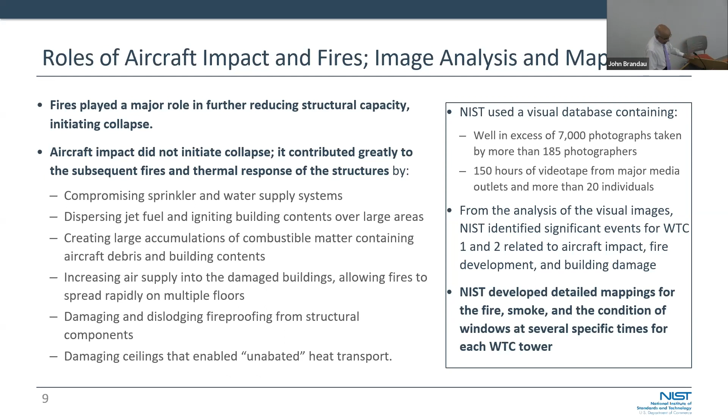So here's the next step of the analysis, which is the fire dynamics. I just want you to know that the airplane came in from the north. This is again the north tower. Fire started, and you'll see by the time this is done, the fire's at the back end. So what you'll see, and I'm not going to wait till the whole thing gets done, is that the fire is at the back end. This is where we have the inward bowing. I showed you the 55 inches.

What I'm also going to show you is we did laboratory work at NIST, the large fire laboratory. We did recreations of the workstation modules in the building with actual workstations from the World Trade Center tower, in the configuration that is there, to validate our models before we predicted the entire building.

The pieces of steel we got - how do I know there were 14 grades of steel? In addition to the documents we had, we actually did high-speed impact tests to determine the impact properties of the steel. This is called the Kolsky bar apparatus at NIST, where we did those tests. So it wasn't that we were just picking up stuff from elsewhere and assuming things - we developed a property database to put into the models. We also got how the workstations were actually located, for the fire dynamics model, so we could model the combustibles in the building with a lot of accuracy.

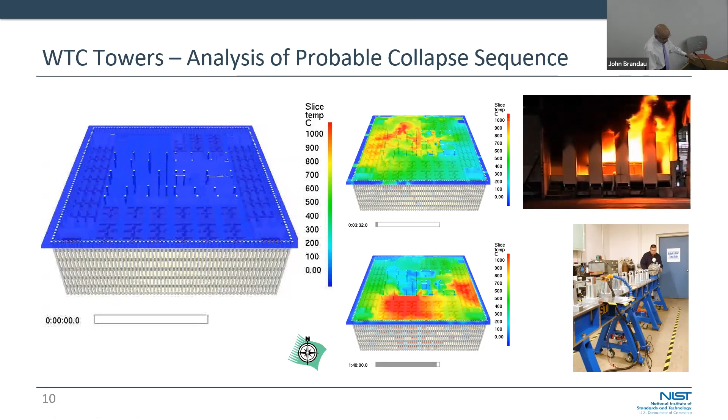All right, now I'm going to show you the end of all of this, okay? Just watch this - the first, left building, which is Tower 1. Plane came in from here. I told you, watch this antenna. And I said that the inward bowing happened on the south face. You will see this antenna tilt to the south, and you'll see the building actually tilting to the south as it collapses.

Okay, and now this is World Trade Center 2. Plane came in from here, exited on the northeast corner. This is where I showed you the inward bowing. See how the building tilts towards the inward bowing as it collapses. So I'm going to let this first one go. Watch the tower, it's going south. And I've turned off the audio for obvious reasons.

Now let me turn the next one on, and you'll see this one tilting to the east - consistent with the models, which show the photographs showing the inward bowing on these faces.

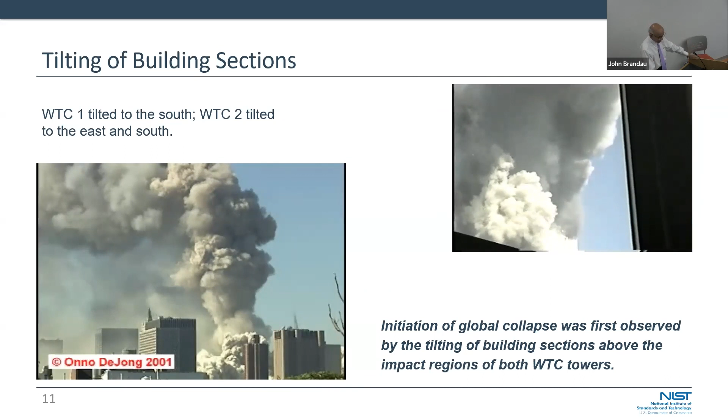So I think it was very easy - I mean, it took us 2.5 years. We started this in August of 2002. We issued our draft report in June of 2005. It took us 3 years to do all of it: collect all the information, analyze, build a model, analyze the information.

Shyam, 3 years and how much money, roughly? Nominally, we asked for $16 million from Congress - I forgot to mention that. We got that through a special appropriation, and that money actually got transferred to us in September of 2002. And I will say there was a lot of research money also augmenting the investigation money, because the two were feeding off of each other. But nominally, 16 million.

In terms of time put in, I think there were countless hours. Let me just say that the 200 people who worked on it - nearly all 200, and by the way that includes people not just the technical experts, but also people from public affairs, chief of staff, congressional affairs. This was a full court press on the part of this leadership, because you needed all pieces - acquisitions, human subjects, you name it - all those issues were involved in this.

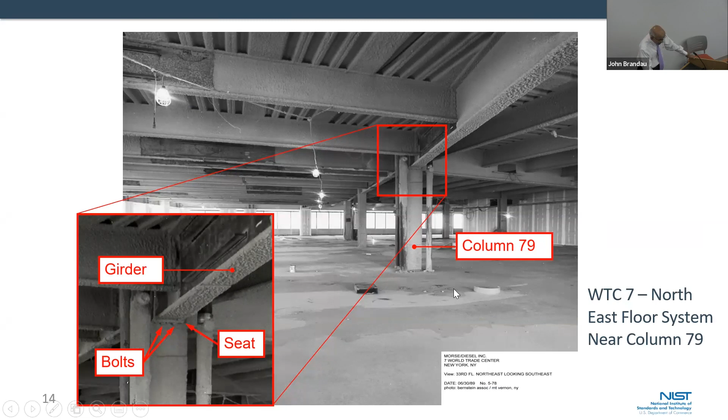You have these horizontal girders. There's nothing here pushing on the other side of these horizontal girders. This particular girder is sitting on the seat, it has two bolts, and that's pretty much it. It's not unusual, it's okay. But what causes this building to collapse is the following.

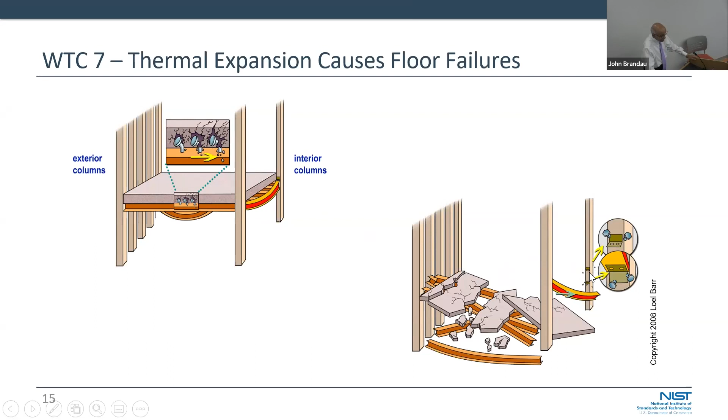As this floor gets heated up, what happens is the exterior is very stiff. The floor is being heated up, the steel expands—the thermal expansion of steel is more than that of concrete. So the steel expands, and what's connecting it to the concrete starts to crack. As it expands, those girders we saw before push on this particular girder—this is column 79, this is column 44—pushing it hard, and eventually that gives way, and the support for column 79 goes away. Just remember that.

What happens actually, when you do the actual simulation, which we have done, is you find that on floor 13, it breaks away, and then...

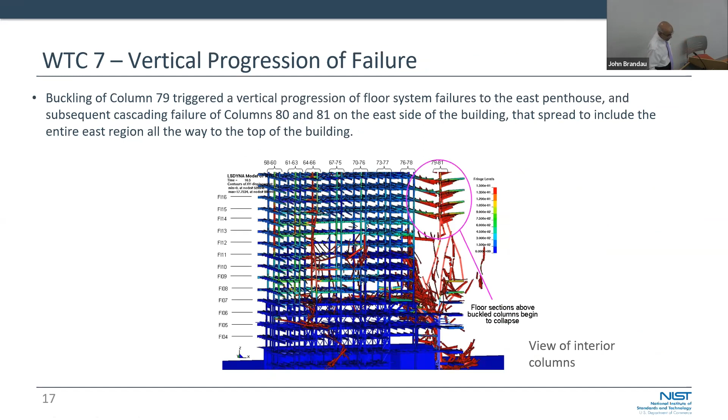That then leads to vertical propagation of failure to the top of the building, to the east penthouse, which I'll show you later. You'll see that column 80 fails, column 81 fails, which are just on the same line with column 79. Once that happens vertically all across the east side of the building, it starts to move from east to west because you're losing support. The floor starts to fail, and it goes from east to west.

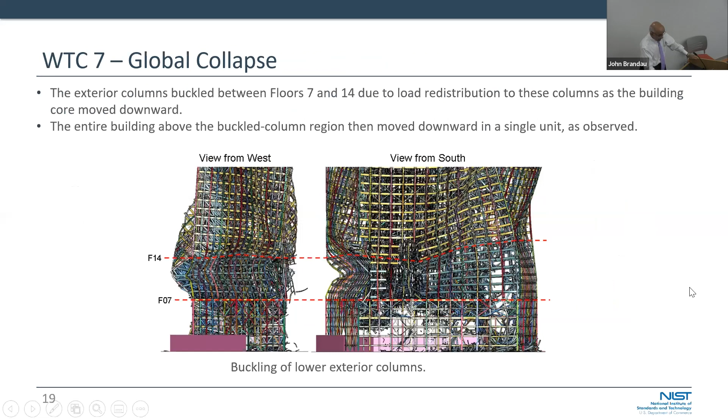And so, Shyam—the audience perhaps doesn't know, we had a number of these beams on our campus for 5 to 7 years. Were there any tests performed to verify the theory you just projected? Or did all that information come from the simulations?

In the case of Building 7, there were no pieces of steel found—ours were just from the two main towers. The 236 pieces of steel were from the main towers, and you could identify them. Now, in the case of WTC 7, we were not able to identify on site or bring and identify at NIST steel that was from that building, because this was a generic building. Unlike the towers, which were stenciled and exquisitely designed, we were not able to do that.

But there were a number of other World Trade Center buildings that also collapsed that day, as you know. It's not just one. There were buildings 3, 4, 5, 6. The hotel also was damaged. So those were more generic components.

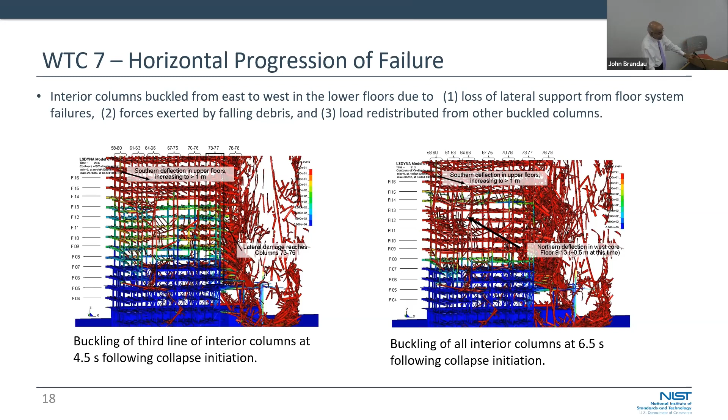So this is now where the validation is going to come. How did we validate what we saw? The thing you have to now look at is the evidence.

So it wasn't that we started with looking at the observation and figured out what to do. We did our analysis and then figured out, okay, what evidence do we have to prove that this is actually happening? And we looked for videos and pictures to see it. So this is what you will see.

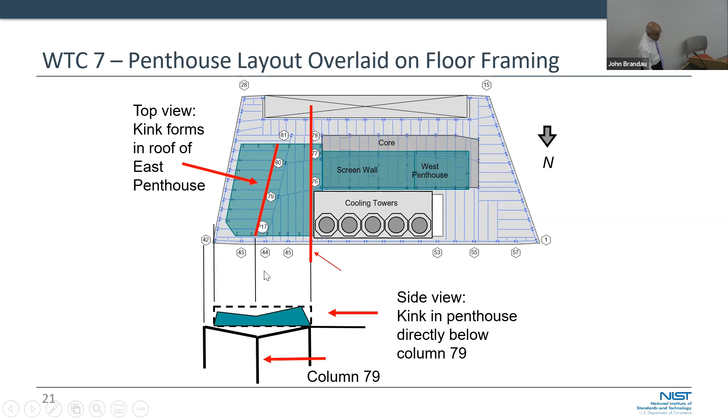Now watch this simulation. This is going to be an interesting simulation. There's a clock here which will work. This is the simulation, this is the video. And this is a picture of vibration, horizontal displacement that we saw as the building moved. You can start to see the kink forming here, as well as here, and the failure starts at the bottom of the building. I'll replay it, I know this is very difficult to see 3 places at the same time.

So watch the bottom here for failures. That's column 79 failing here. Then you can watch the kink here and here develop, and eventually they start to collapse.

A couple of words on this. The model used for this particular piece of the analysis was called LS-DYNA. Some of you may know that term, it's a computer tool. It was so detailed that the amount of time it took to make one run was 6 months. One run.

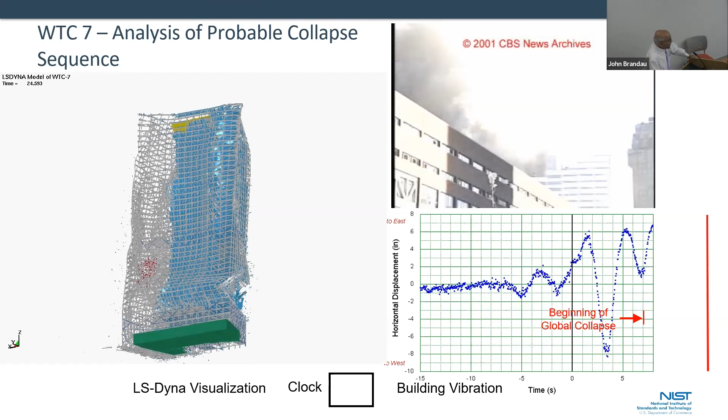Shyam, why were we so lucky? Why did we get this assignment? That's a rhetorical question, of course. Why, I don't know really, other than the fact that I pushed a lot for it. I will be honest with you, I pushed a lot. Jack Snell and I, but why did we want it?

Let me put it this way. NIST has done these investigations in the past. We have a long history of doing it. We are very proud of having done these things. It wasn't our first rodeo. The Building and Fire Research Laboratory investigated the Kansas City Hyatt Regency walkway collapse, the Murrah building collapse, the San Fernando earthquake, post-disaster investigations. We have a long history of doing this, and we felt that this was something.

I think we bit off more than we thought we were biting into at the time, but also probably naive idealism on the one hand played a part in it, and also the sheer horrendousness of this entire incident, and the fact we wanted to learn for the future, and wanted to make our contribution to the nation in some fashion. This is the best way we thought we could do it.

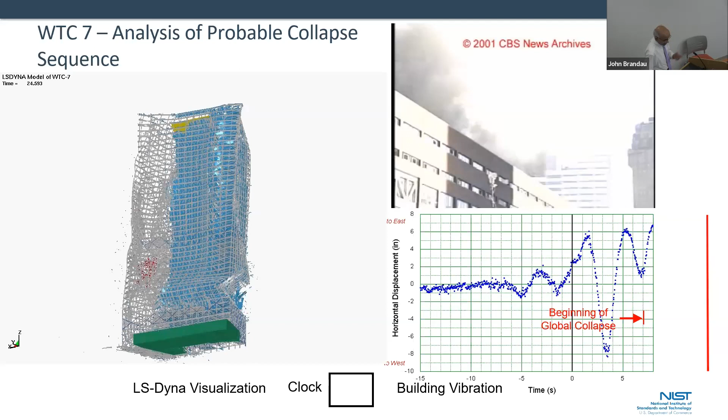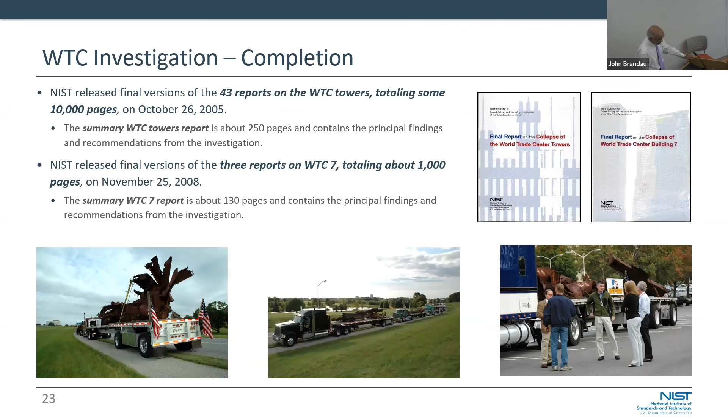So we completed our investigation. We issued reports to complete this story: 43 reports on the towers, 10,000 pages long. You can find them all published and available online. 3 reports on WTC 7, 1,000 pages long, both of which have summary reports, roughly 250 pages for the towers and 130 for 7. We made 31 recommendations. Major US building fire codes have adopted those recommendations, which I consider comprehensive and far-reaching, all within 5 years of our study.

Now, have you ever seen national building codes change in 5 years? I haven't since then either. We were able to accomplish that because of the importance of the event and the public engagement on it.

I can get into the specifics of the changes, but everything from better fireproofing to better fire resistance rating and structural integrity, to better ways to evacuate occupants, fire service access to buildings, and emergency responder communications. Our recommendations have had a significant impact on design and construction practice worldwide.

So when you look at all the new buildings that have come since then, including the Freedom Tower, the new Building 7 which was built, as well as some of the very high-rise buildings in the Middle East, in London—the Shard—and in China, Taiwan, and Malaysia, there are pieces of our recommendations that have all been included in those buildings.

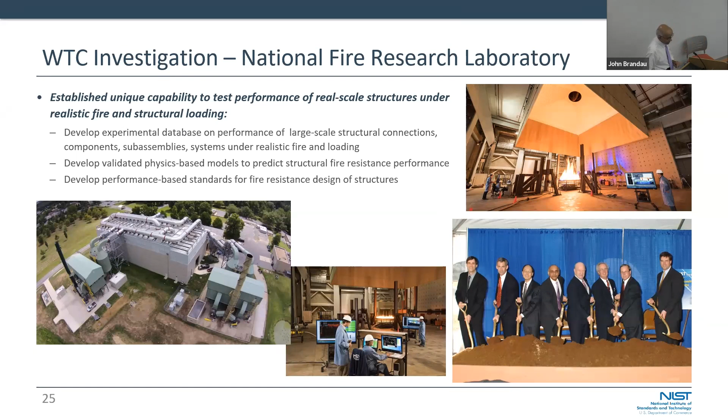Three very quick things before I conclude. As a result of our investigation, we built a national fire research lab. We began construction in 2009. What you see is our existing lab, along with the exhaust system. This is the new lab and the new exhaust system, where we can actually test structures under fire that are being loaded—meaning structures undergoing loads or forces imposed on them while there's also fire, a unique capability in the entire world that doesn't exist elsewhere. This is because of 9/11. So we can get to performance-based design.

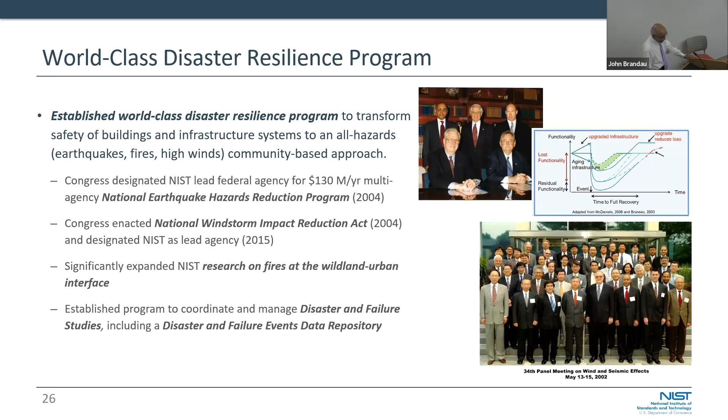We have established a world-class resilience program. Resilience is now the word, by the way—just so you know, we started the resilience program at NIST in 2007. Everybody uses the word resilience today, but that's when we started. We are now the lead agency for the National Earthquake Program, a multi-agency $130 million a year program. We're the lead agency for the National Windstorm Impact Reduction Program, dealing with hurricanes, tornadoes, and storm surge. We have expanded our research on fires in the wildland urban interface, which is so important, particularly in the West but also in the East. And we have formally established a disaster and failure studies program.

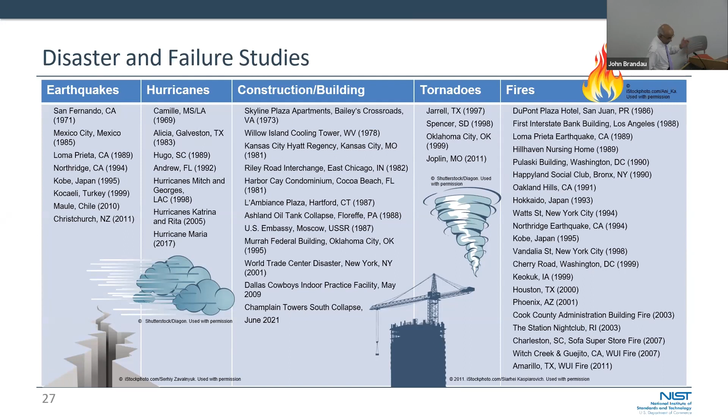So with that, thank you for your attention. I'm sorry I took a few more minutes longer than planned.

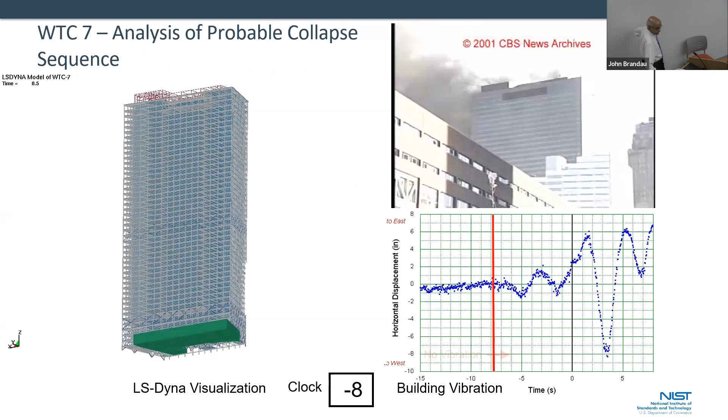So the first one, from my layman angle, is referencing your slide 23 or 24, where you mentioned the beginning of global collapse. As I read that, I was thinking of Chinese inroads, looking at the space beyond the United States now, given its position in global politics. I'm looking at Africa and Chinese inroads in so-called infrastructural development. Is there any effort to mitigate or eliminate Chinese inroads in Africa in terms of that? That's one.

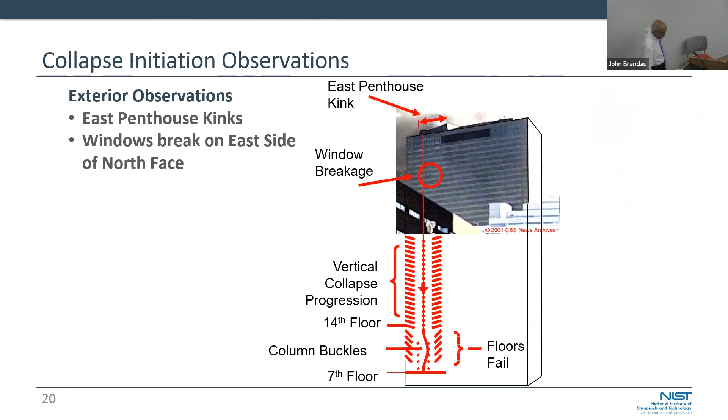Two, I'm fascinated by slide number 12. Three of our students here are doctoral students in information systems, and I think they'd be interested if you could shed more light on the last bullet, talking about the complexity of the operation. Was there a breakdown of communication and information systems during the period, and what has been done since, post that horrible event on 9/11? I think I'll pause.

No, let me put the third one: steel or concrete, a general question. I'm trying to frame a question for either an undergrad or graduate lecture of this type — steel or concrete, what would you choose? From your presentation, I'm thinking perhaps without the horrible event of flying those planes into the south, the two towers, given the structural analysis and the absence of... how do I put it... the building collapse might have come years later. I may be wrong, I'm not a physicist or civil engineer, I'm a historian, so I'm asking within the context of a layman. Thank you, but brilliant analysis, easy to follow, unambiguous — you deserve another clap.

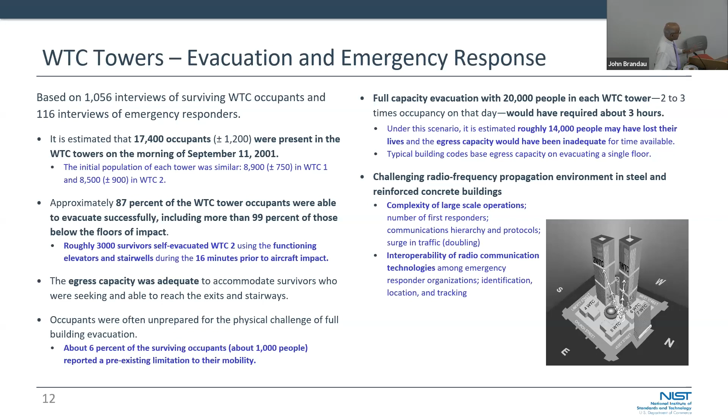On the question of steel versus concrete, the most important thing we took away is we're not calling for buildings to be designed for airplane impact. All the building code changes are about what's appropriate, things like improving fireproofing so that when something hits a building really hard, it doesn't get dislodged.

The bond strength is far better, the installation is much better, the inspection is better, so the quality control is better, so it has more ability to stay, not for an airplane impact, but for other events, particularly for high-rise buildings. We make a distinction between buildings that are 120 feet and more, or 400, 420 feet and more. That's where the codes differ, because risk is the hazard and the consequence. The consequence is much higher for high-rise buildings because evacuation problems get multiplied hugely, so the risk is much more. It's a risk-appropriate approach to the codes, and many requirements are more stringent for high-rise buildings.

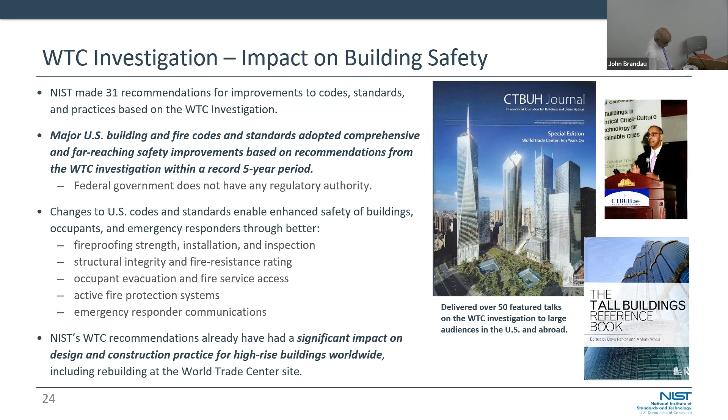My first question is in reference to slide 5. Was the figure on the left the top view of the building? The figure on the left is the plan view or top view of any given floor in the building, correct? Second question, do you take into consideration the total weight of the planes when the building collapsed, and what is the weight limit for the planes?

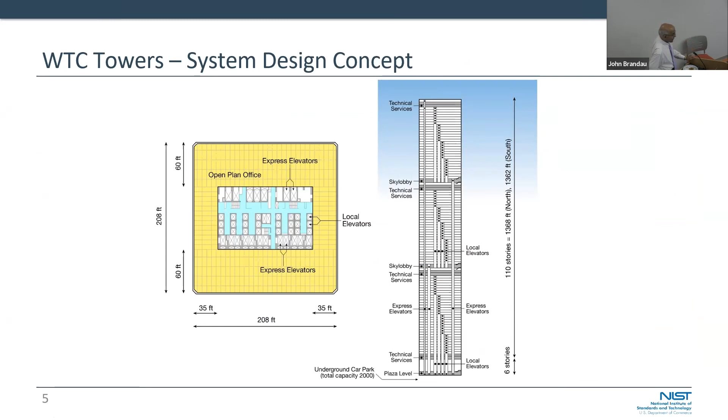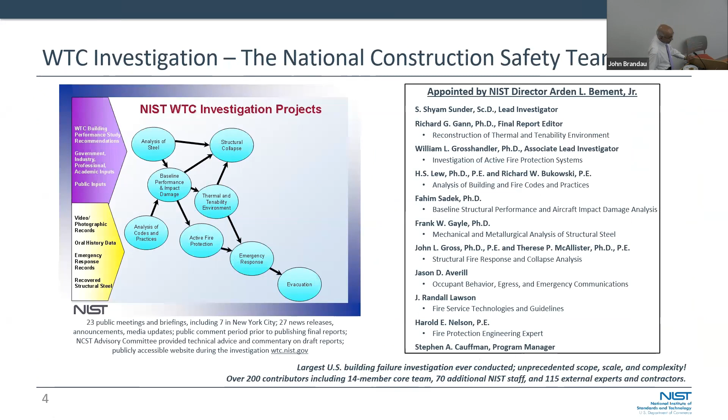A very good question. Momentum, as you know, is the primary driver of the impact analysis. In the case of the planes, the simulation we showed, we had to make sure the massing of the plane was adequately taken into account. So the jet engines, which are very heavy, were exquisitely modeled, and the fuselage is not so strong, it's just going to disintegrate.

We included how much jet fuel was in which fuel tanks, which we got from American Airlines and United Airlines, the two planes that were affected. We also got from the airlines the luggage, the cargo hold — it turns out in one there was seafood, and in the other some other cargo. So we actually had the explicit weight of the cargo in the cargo holds of the airplanes.

And they were placed in the appropriate places. We also had to account for the human beings in the seats in the plane. So if you look at the detailed model of the plane, you'll see all of that. And I'm sorry I have to talk about the human beings as well, but yes, all of this involved people.

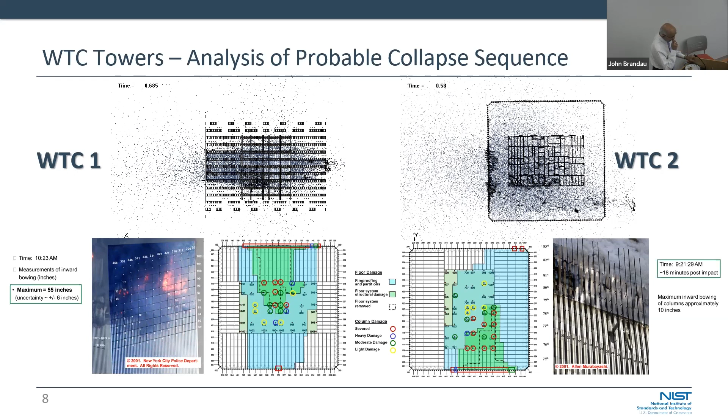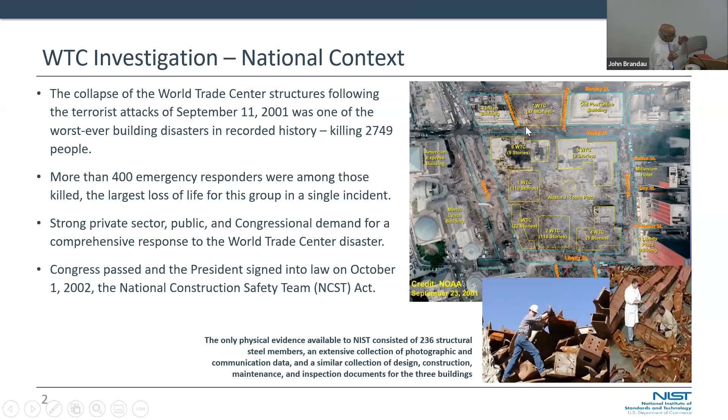So in the case of World Trade Center 7, remember that no airplane hit it. What I probably glossed over, I'll show here. The North Tower collapsed at 10:30. Here is the North Tower, and here is World Trade Center 7. The debris from the collapse of this 110-story building hit the south face and the west face of WTC 7, and that's where that debris initiated the fire.

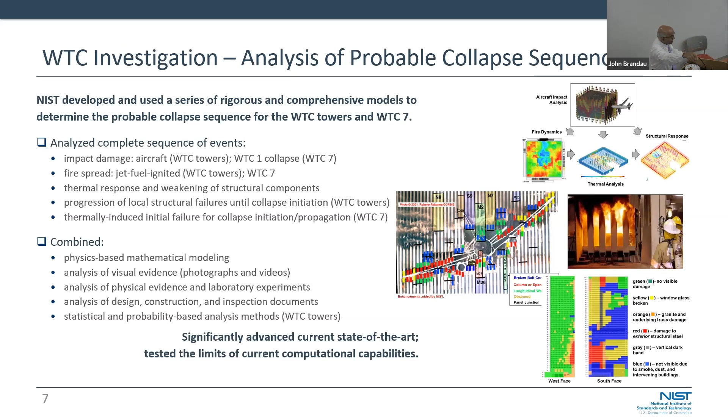Let's go back to the plan view of 7. What I just showed you is this face and this face, and the damage was here. Before the fire actually showed up at the northeast corner, it took a very long time to get there from the southwest corner, because it's a very large floor, and there was no jet fuel, no breaking windows. There wasn't propagation of fire at the speed you saw in the towers—it was a much slower building fire. This building also didn't have so many open floor plans, so it was not easy for the fire to go from compartment to compartment to compartment, ultimately to the back of the building. That's what took a lot of time.

All of that was modeled, it's in the report. I could have gone through all of that, but didn't want to bore you with even more information than I've already shared.

Should we wrap up? There is one last question. This last question has to do with the microstructural analysis of the steel that was damaged by the fire, and if you could talk a little about what at the microstructure level caused the failure.